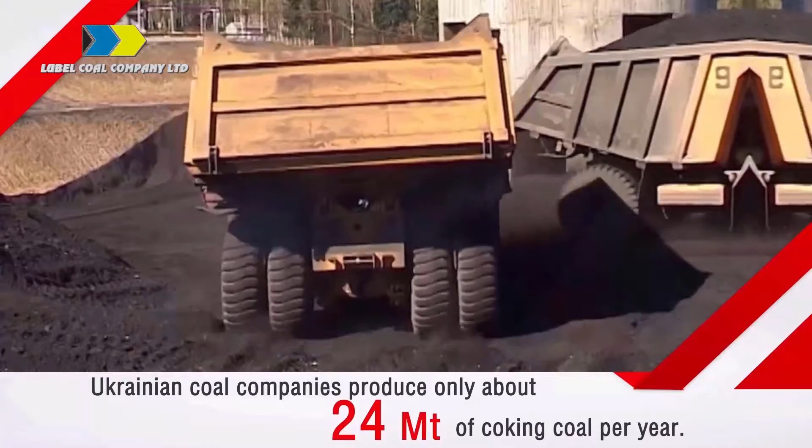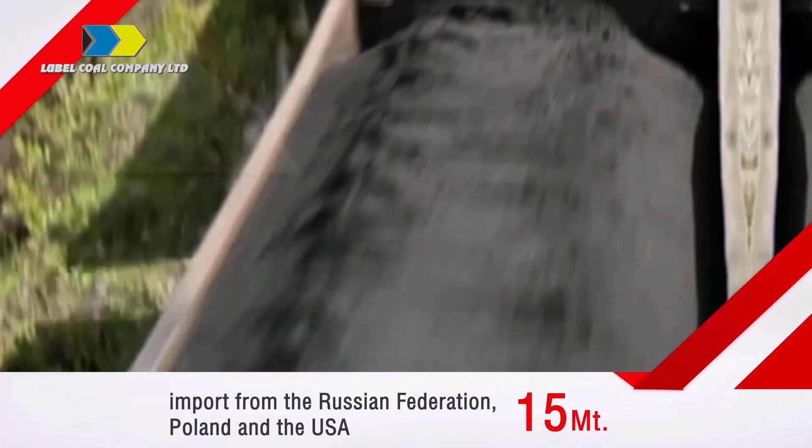Ukrainian coking plants consume 36–38 million tons of coking coal annually. Ukrainian coal mines produce only about 24 million tons of coking coal per year. The shortage is compensated by import, especially from the Russian Federation, Poland and the United States. Remoteness from mining areas increases the cost of coal. Construction of a new coal mine will allow to significantly reduce the dependence of coking industry upon the imported coal.

Lubelska Numbers 1 and 2 mine project is a new project to develop underground coking coal mine in western Ukraine. The construction project is owned by Lubel Coal Company Limited and implemented by its subsidiary company CCI Lubela. CCI Lubela is an operator being responsible for design and construction of up-to-date high-technology mine on production, processing and sale of coking coal. A skilled team with high experience in designing and mining and civil construction provides the engineering support for the project implementation.

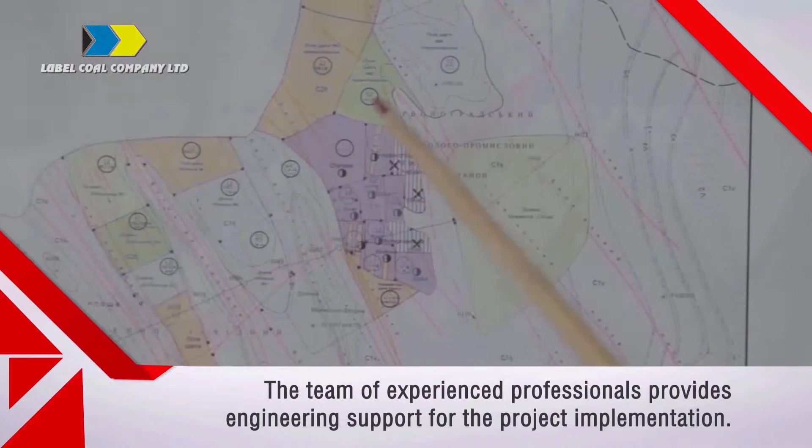Project implementation is motivated by keen demand for a high-rank coking coal at the world market against the reserves depletion and decline in coal output by coal mining countries of the European Union such as Germany, United Kingdom, etc. The greenfield Lubelska coalfield was discovered in early 1970s.

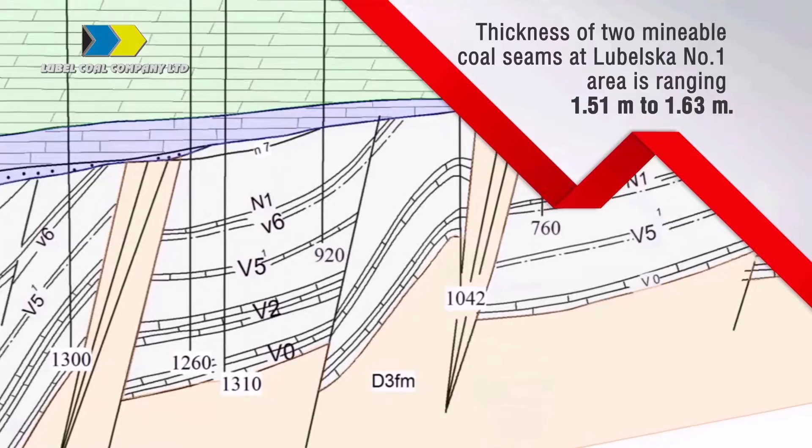It's a part of Lviv-Lublin coal basin and it's split into 5 blocks. Lubelska Numbers 1 and 2 mine includes 2 areas, Lubelska Number 1 and Lubelska Number 2. The special permit for coal production in these areas was issued to subsidiary company CCI Lubela by the Ministry of Environmental Protection of Ukraine. Lubelska Number 1 contains 2 working coal seams with average thickness of 1.51 meter and 1.63 meter. Lubelska Number 2 contains 3 coal seams with average thickness ranging from 1 to 1.3 meter. The depth of the coal seams is between 700 meter and 930 meter.

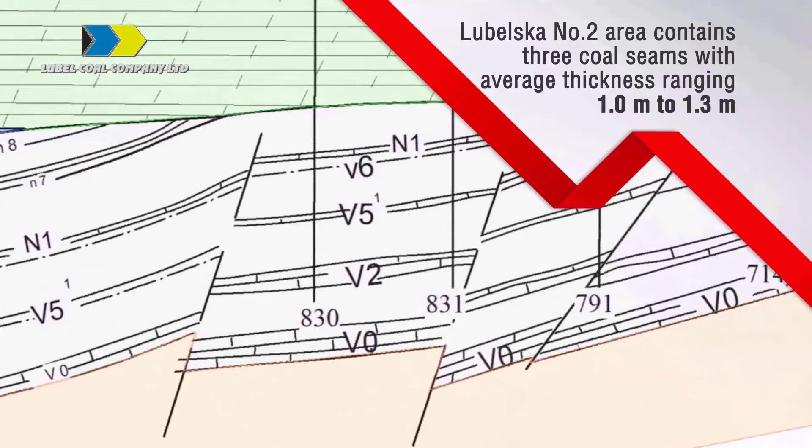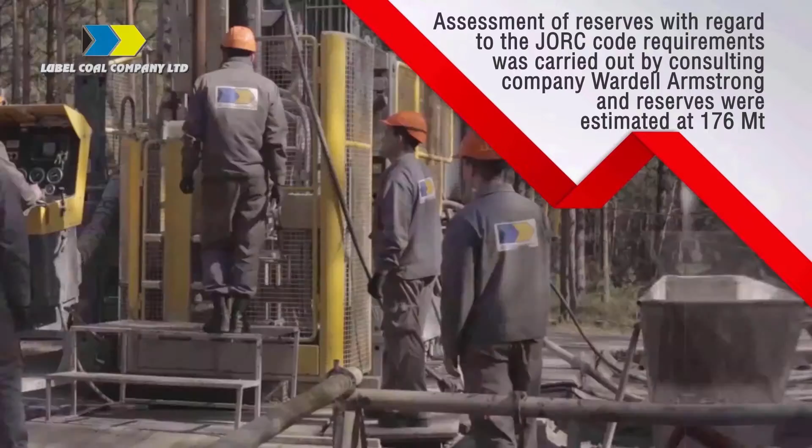Geological and exploration works have been carried out during the period of 1998 up until 2005. 438 deep boreholes drilled at the coalfield allowed to determine both the parameters of mineral deposits and the coal quality parameters. The reserves of K-grade coking coal were approved by the State Committee of Useful Mineral Reserves of Ukraine. Assessment of the reserves and resources with regard to the JORC code requirements was completed by the British independent consulting company Wardell Armstrong. The reserves of coal were estimated 176 million tons.

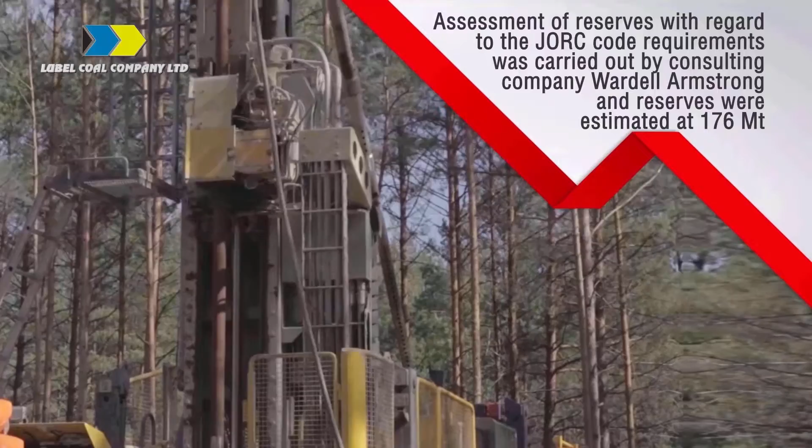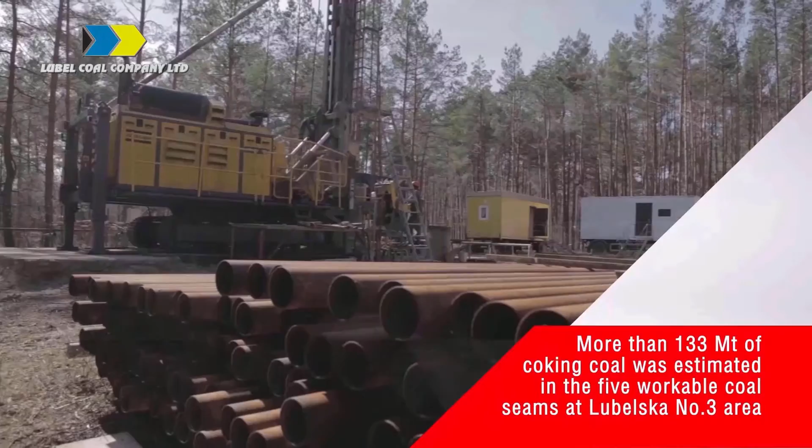The adjacent Lubelska Number 3 area is considered as a standby block for Lubelska mine. More than 133 million tons of coking coal have been approved for the 5 workable seams. The company has been granted a license for geological exploration of the area. Exploration works are being carried out there currently. Deep boreholes are drilled by modern Christensen CT20 and CS14 drilling rigs produced by the Swedish company Atlas Copco. The core recovery from boreholes drilling is 95%, that is necessary requirement for classifying coal reserves in terms of the JORC code categories.

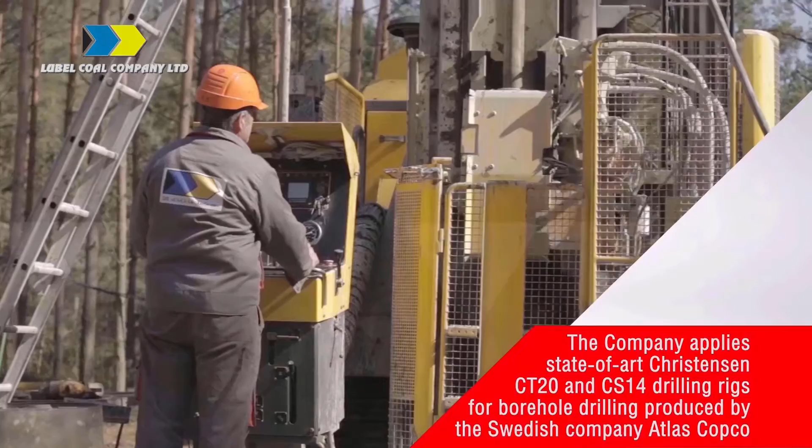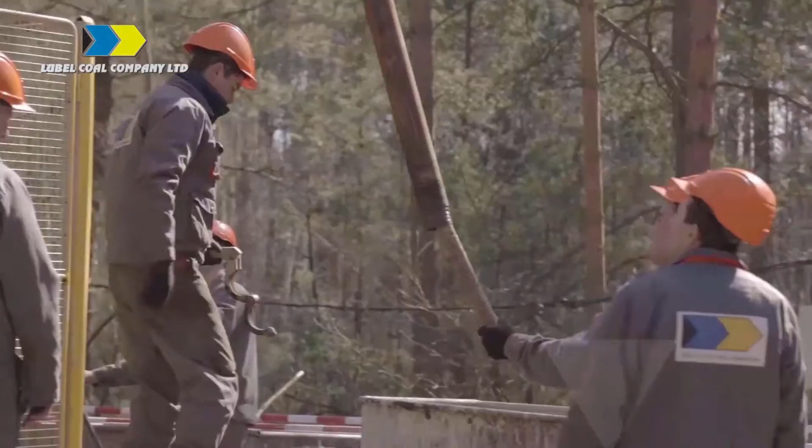Further to the geological exploration, which includes the whole spectrum of coal quality assignments, reserve estimation and then approval of the State Committee for Reserves of Ukraine, the company has a mind to obtain the license for the mining of reserves. This results in a total more than 300 million tons of coal. Scientific and technological support for the geological and exploration works is provided by the Polish company GeoExpert.

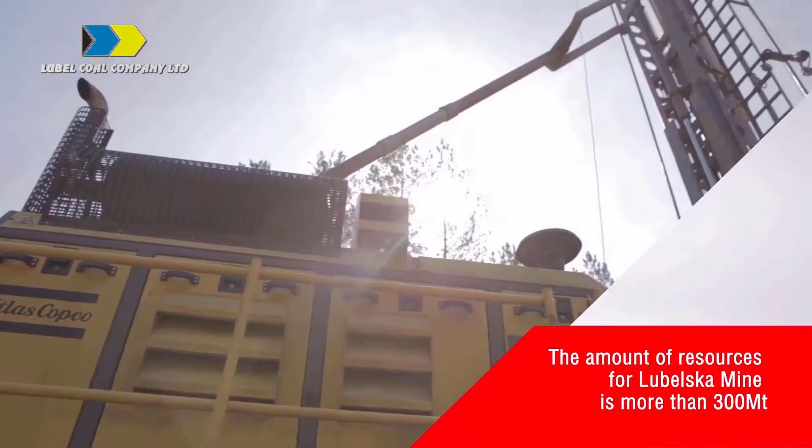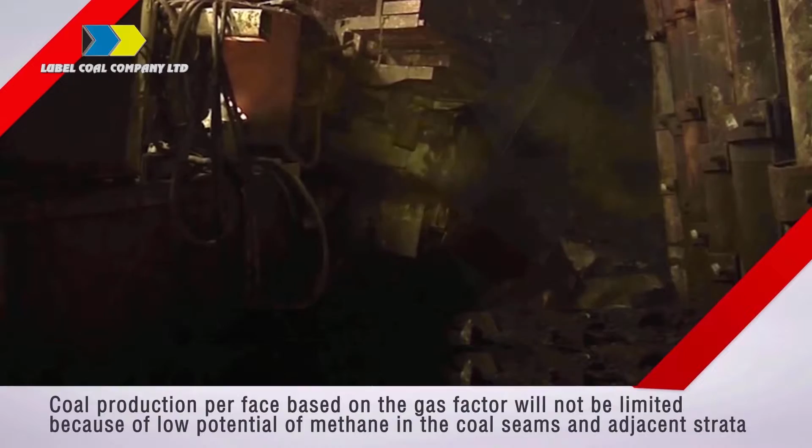Geological conditions of seam mining are expected to be favorable. Flat dip of coal seams, continuity of seams and seam roof and floor stable strata allow to apply the high productive mining equipment. Coal production per face based on the gas factor will not be limited because of low potential of methane in the coal seams and adjacent strata.

The Ukrainian feasibility study for Lubelska mine construction was produced by the Lugansk Dniproshacht, a leading institute in mining sector, assisted by a number of reputed foreign companies such as Wardell Armstrong from United Kingdom, Mineral and Energy Economy Research Institute of the Polish Academy of Science, IMC Germany, Setco USA, and Hefei Research and Design Institute China. The project provides for construction of underground coal mine with production capacity of 8 million ton per year of ROM coal.

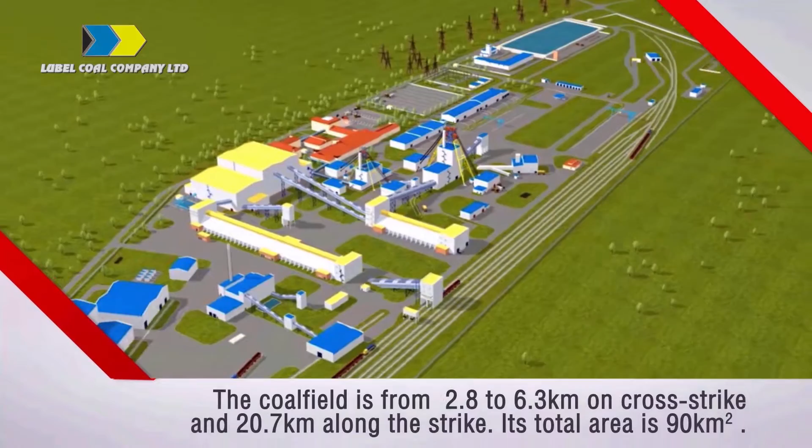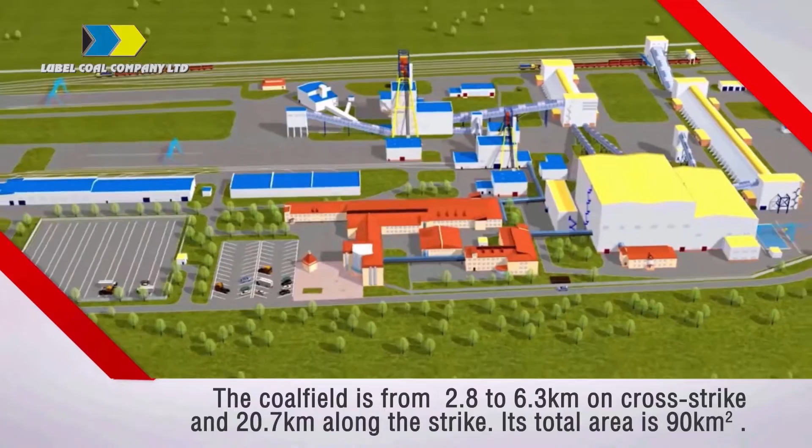Coalfield boundaries, including Lubelska No. 3 area, are as follows: from 2.8 to 6.3 kilometers and 20.7 kilometers along the strike. The coalfield occupies the area of 90 square kilometers. Lubelska mine project is located in the Zhovkva and Sokal districts of the Lviv region, 30 kilometers to the state border with Poland. The new rail link comprises the construction of 12 kilometers of a rail track from existing railway line to mine site. The developed transport infrastructure will allow coal supply to both Ukrainian and European markets.

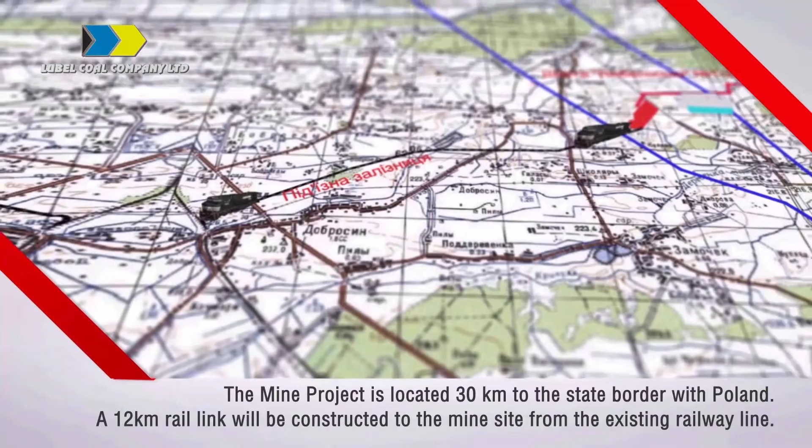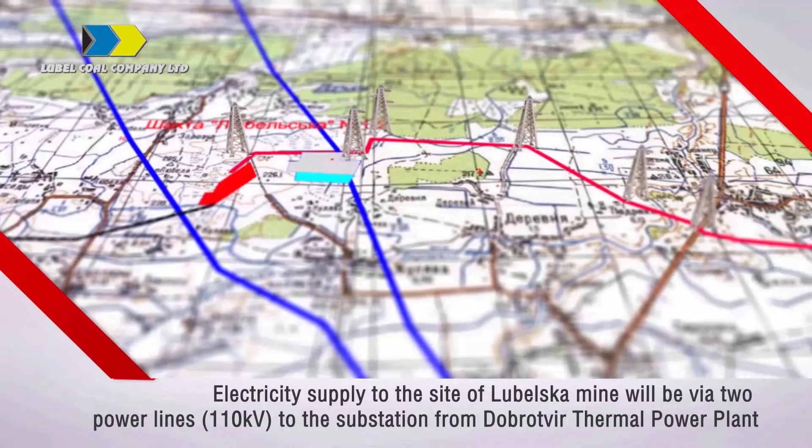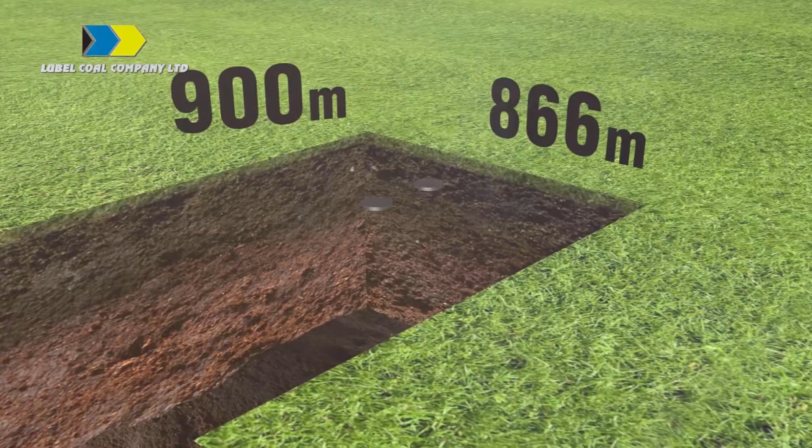Electricity supply required for the construction and operation of mine will be arranged from the Dobrotvir thermal power station. The proposed power transmission line comprises two 110 kV overhead power lines. The coal field will be accessed by central double vertical shafts to the depth of 900 and 866 meters respectively. The pit bottom area will be developed upon completion of the shaft sinking.

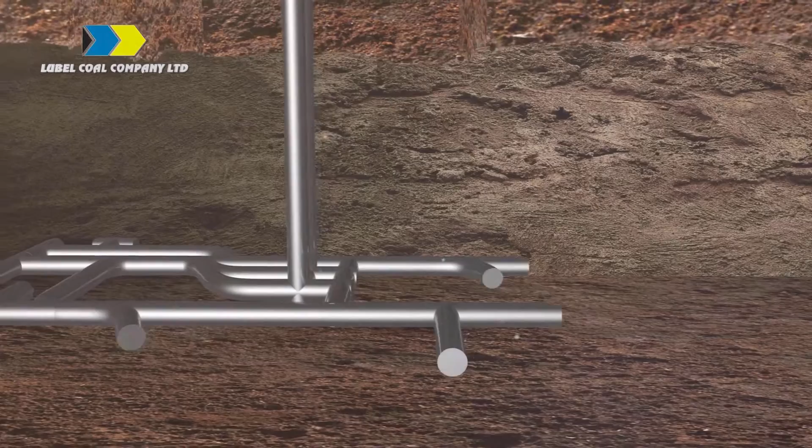Then the first longwall will be developed in the block number 1 north side in order to begin coal production at an early stage. Access roadways for the development of the rest longwalls will be driven simultaneously. Longwall faces will be equipped with high productive plow systems of the Caterpillar company.

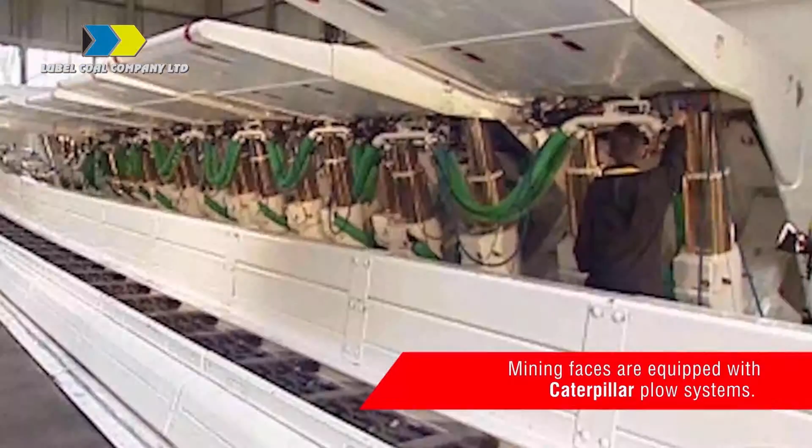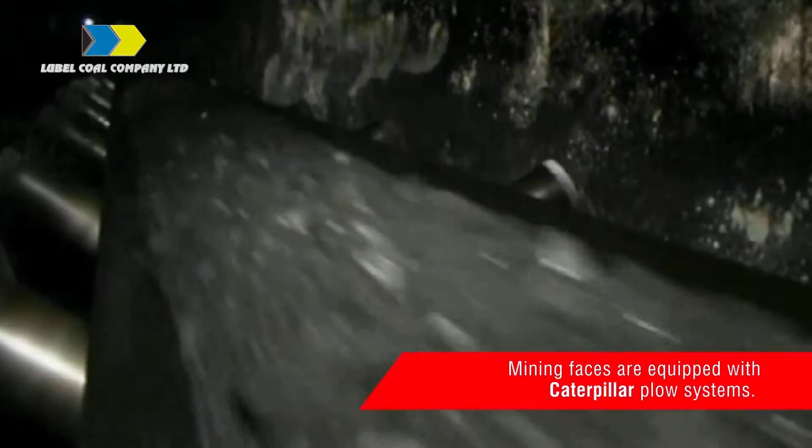Therefore, the plow systems are designed to work automatically. The plow is remotely controlled by an operator from the mine surface using computer control. This also minimizes the number of personnel in the face and allows to reduce significantly the risk of injury rates.

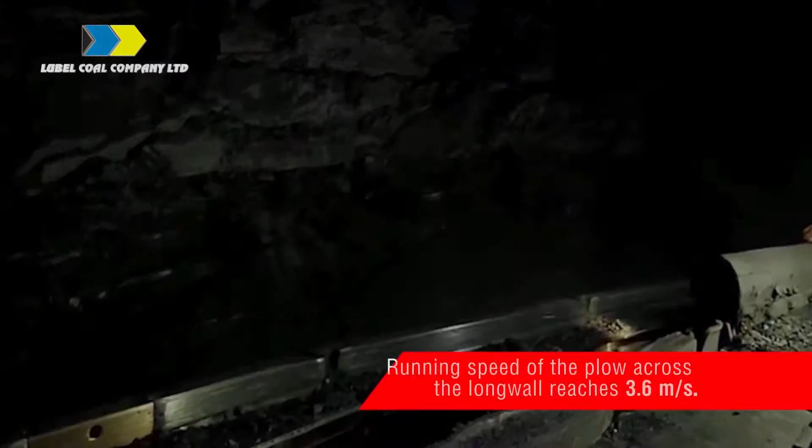The plow is pulled along the longwall face on a rail track mounted on one side of the armored face conveyor by two motors, one at each end of the longwall. The plow system cuts thin strips of coal between 8 to 20 centimeters thick. Due to the high speed that the plow travels, up to 3.6 meters per second, it has achieved a high productivity

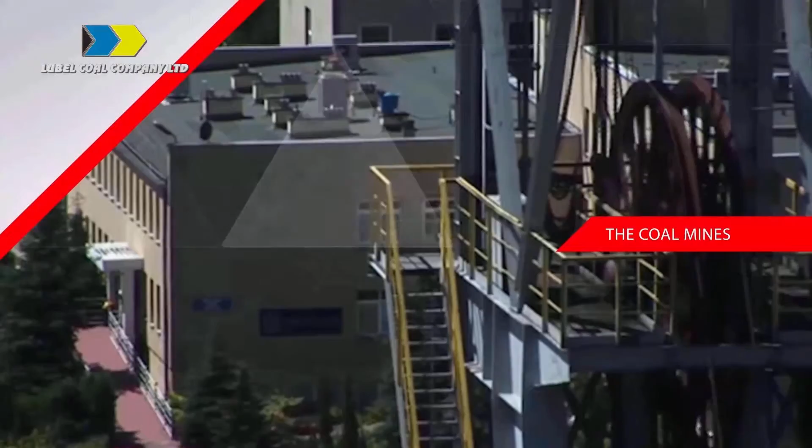of mining equipment. Such systems make a good showing in coal mines during development of thin seams in Germany, Poland and the United States. For instance, Bogdanka mine in Poland, which operates in geological conditions similar to that of Lubelska Numbers 1 and 2 mine, achieved very good results on coal mining with plow systems.

Daily output from a 300 meters long face in seams of 1.5 meter thickness is 17,000 tons. Maximum output was more than 24,000 tons per day. In order to reach the design capacity of 8 million tons per year, it will be operated from 3 to 5 plow systems simultaneously. Coal washing will be carried out by the own preparation plant.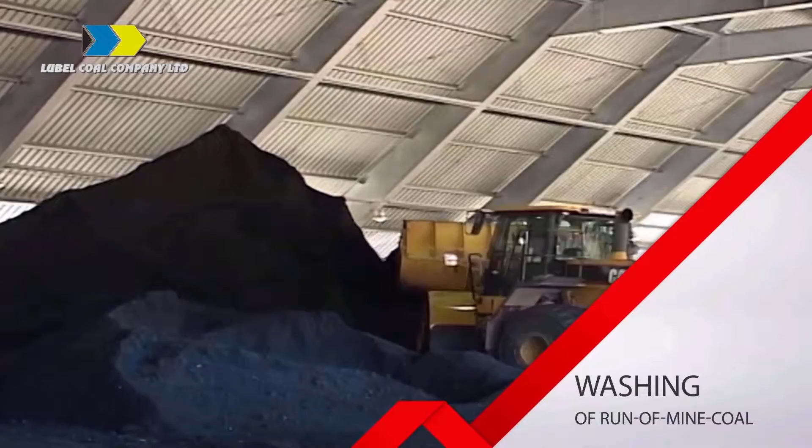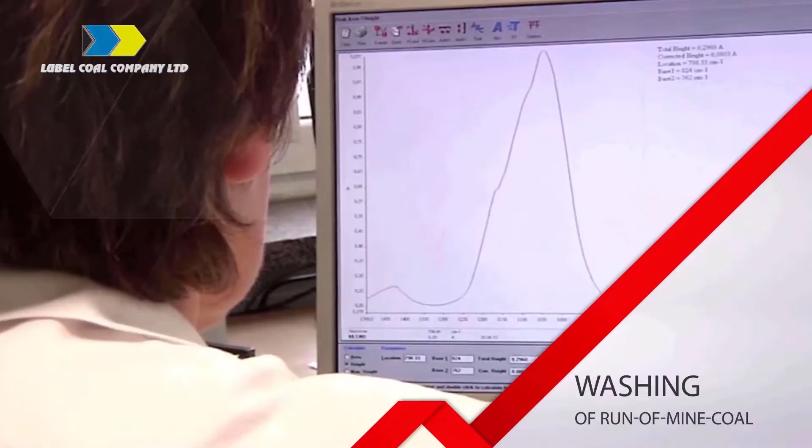The coal preparation plant project has been developed by the Capital Equipment and Trading Corporation, CETCO USA. The company is highly experienced in developing technologies for coal washing. Automatic control of the flow sheet of coal washing and permanent online inspection will allow to produce coking coal concentrate of high quality to be compatible with the best coking coals on the world markets.

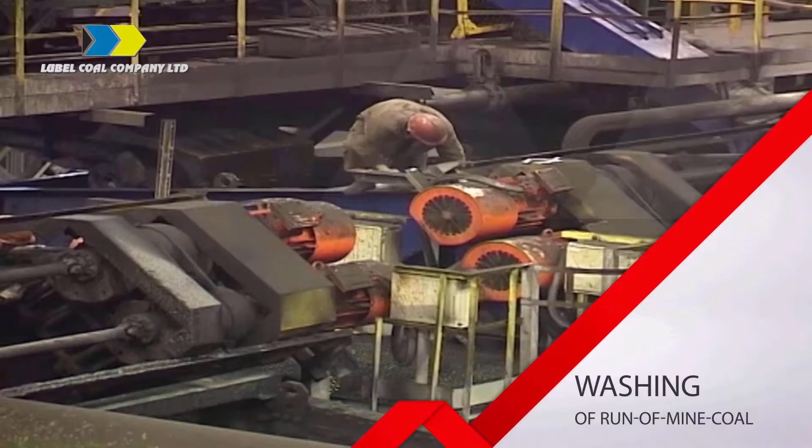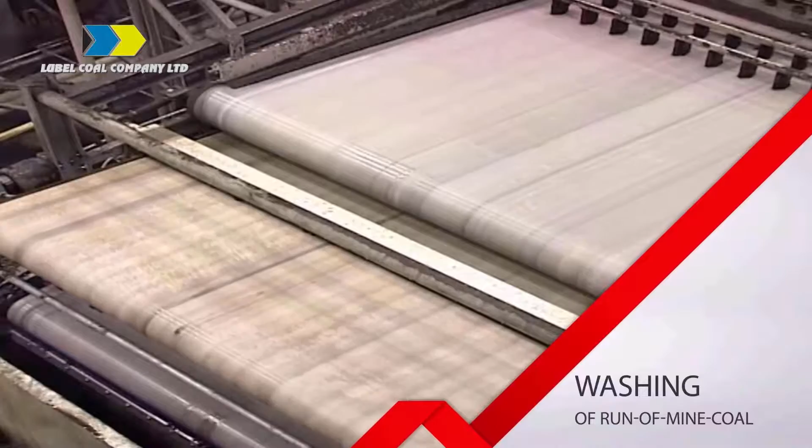The sellable production, that is coking coal concentrate of the most demanded K and G coal grades according to the Ukrainian classification, or premium low volatile coking coal based on the international classification, with ash content of 4–6% and sulfur up to 1%. The plant will be environmentally safe. It will operate using a closed water slurry flow sheet. Therefore, it is not intended to use flotation, which involves chemical substances.

The environmental protection issue has been developed in accordance with the international requirements of the coal mining industry in the field of environment, health and safety. Protection methods proposed under the project significantly reduce both atmospheric emissions and pollution of soil and groundwaters with harmful substances.

The process flow sheet for the mine water desalination system will be constructed according to the building block principle and will have 4 reverse osmosis units. The water that has undergone the process of desalination will be used for the technical needs of the mine and preparation plant as follows: for sprinkling the underground roadways, process flow sheets of the preparation plant, in shower rooms, in laundries and in fireproof networks.

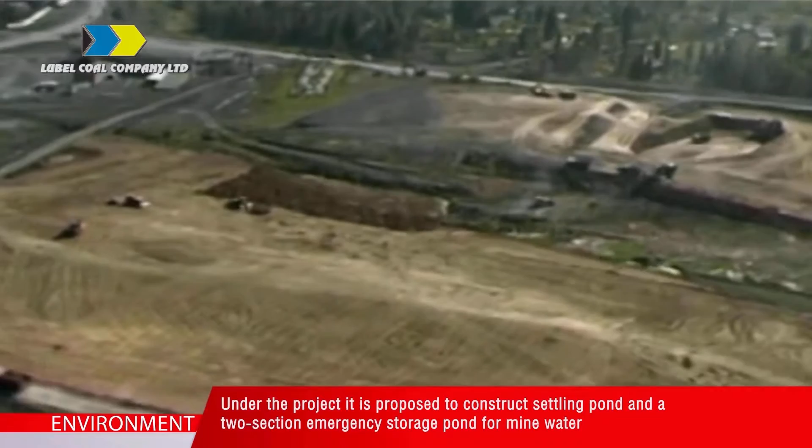Under the project, it is proposed to construct a settling pond and a two-section emergency storage pond for mine water. It is anticipated to arrange the pond's bottom and slope capping layers in order to prevent infiltration of mine water. Mine waste dumps will be arranged based on new environmental standards. In terms of forming the waste dump, it is anticipated to arrange full insulation of the dump base in order to prevent the ingress of contaminants in the body of the dump.

The air basin will be protected from the gas emissions produced by the mine boiler house. The project of a powerful purification installation has been developed. It is capable of reducing the amount of harmful gases and suspended particles in emissions up to 95%.

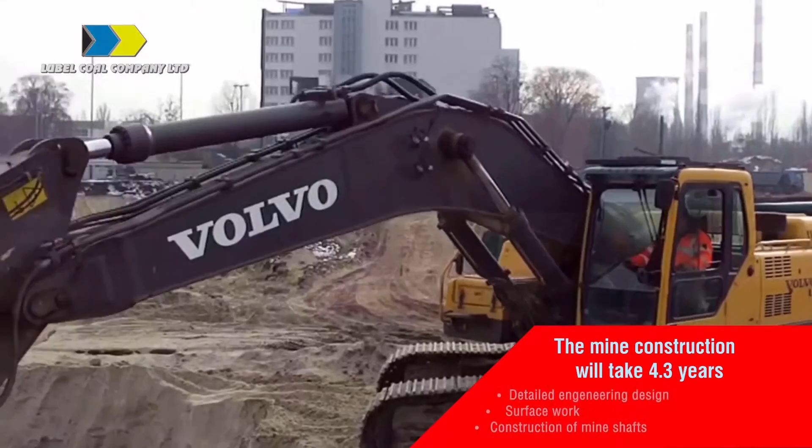The mine construction will take 4 years and 3 months. The tight construction schedule will allow commissioning the mine in year 5 and reaching production capacity in year 6 from the construction commencement. Because of old mine closures in the region, a large amount of experienced and well-skilled coal miners are available for a new job execution. The total amount of provided working places will exceed 3,300.

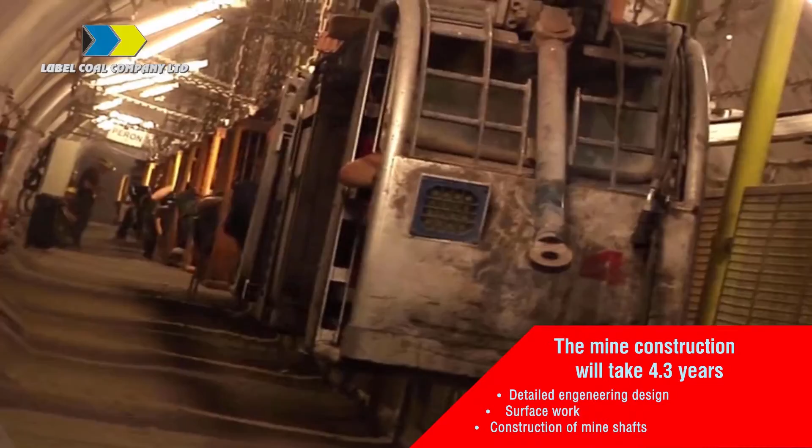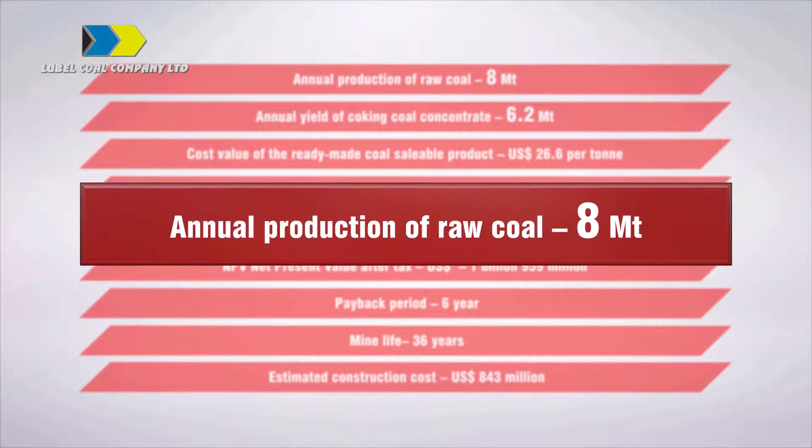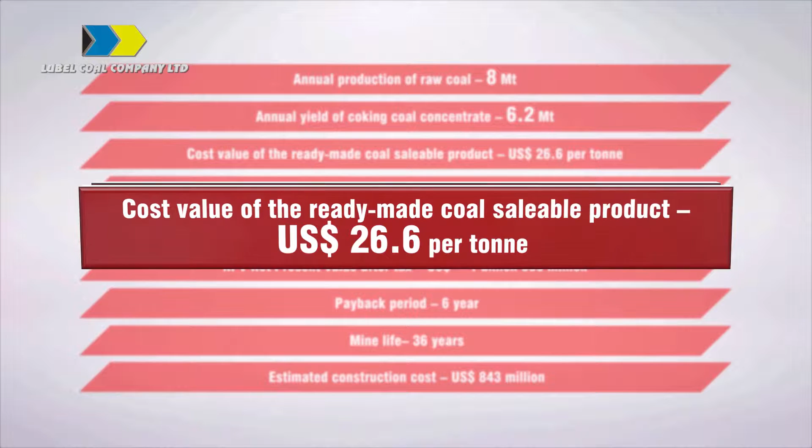The anticipated technical and economic indicators of the project confirm its high profitability. In this respect, it is possible to talk about the following data. Annual production of raw coal: 8 million tons. Annual yield of coking coal concentrate: 6.2 million tons. Cost value of the ready-made coal sellable product: $26.6 per ton.

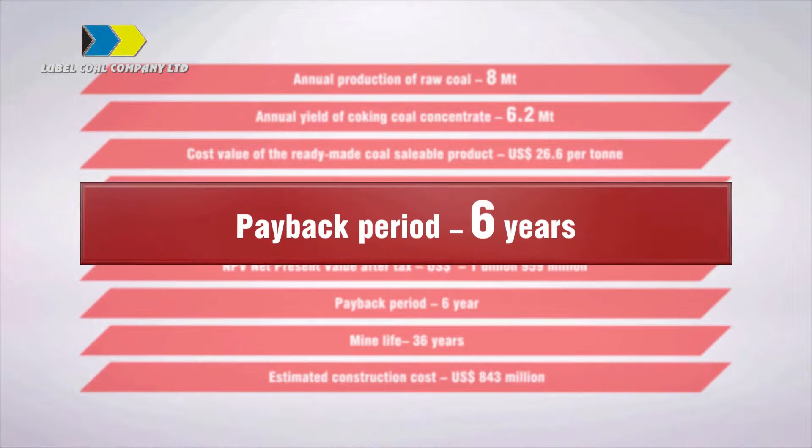Internal rate of return after tax: 38.5%. Profit after tax for the first 8 years of mine operation is $673.2 million. Net present value after tax: $1,959 million. Payback period after income tax: 6 years. Mine life: 36 years. Estimated construction cost: $843 million.

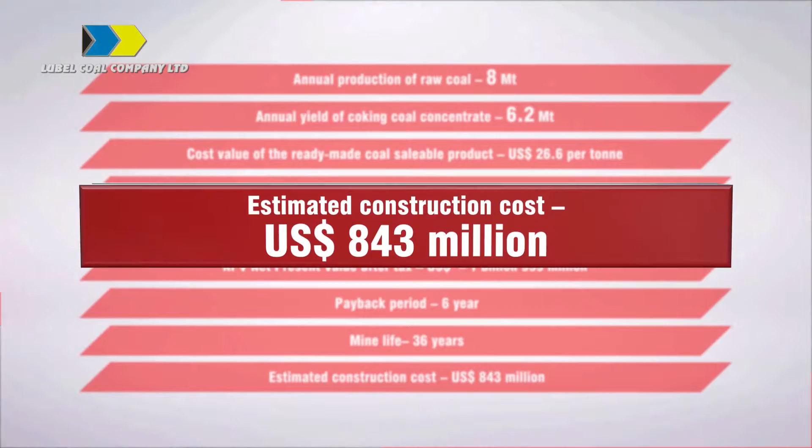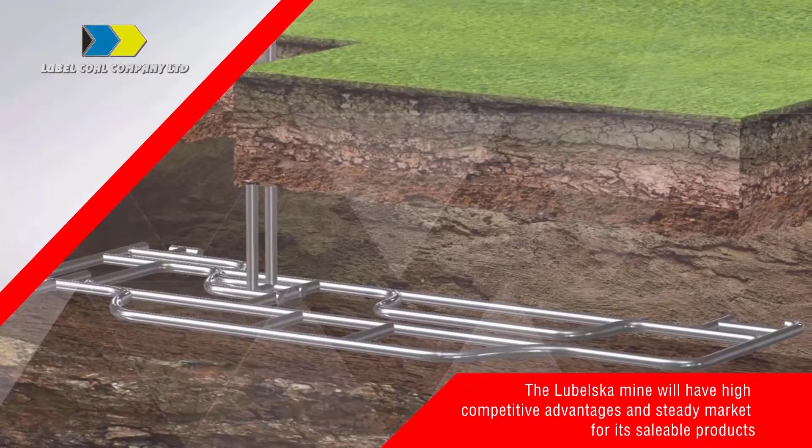Project implementation will allow to construct a cost-effective and high-quality coking coal mine in western Ukraine. Lubelska mine, located close to consumers in Eastern and Central Europe, as well as connected to the developed railroad networks with a good transfer capability, will have high competitive advantages and a steady market for its saleable products.